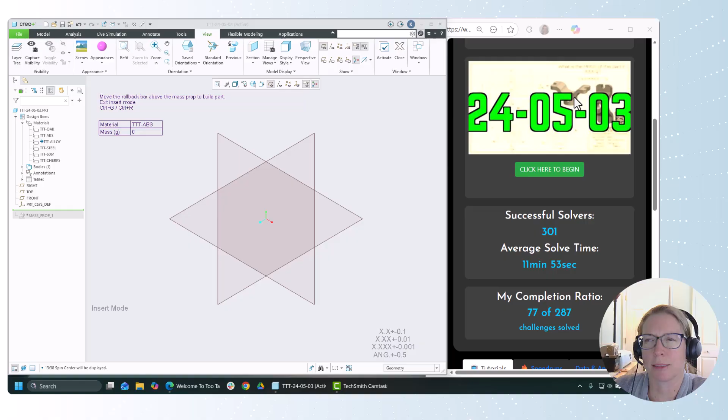Jumping back into Too Tall Toby, 240503, and we've got some symmetry and a tapered hole on this one. So let's jump in. All right, so we are in grams. This one is gonna be alloy. Let's see here. There we go. And let's go.

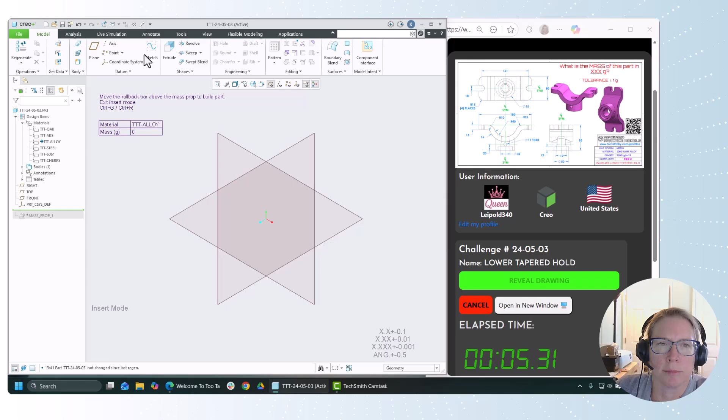All right, so I'm gonna start my sketch on the front view, and I'm gonna make this as a thicken sketch. I'm gonna do that, and then a center point arc. And let's get that dimension of 40. So that's kind of one of our main geometries. So what I'm doing here is I'm sketching for half of this, the inside, and then I'm gonna thicken, do some of the stuff on the end, and then mirror it.

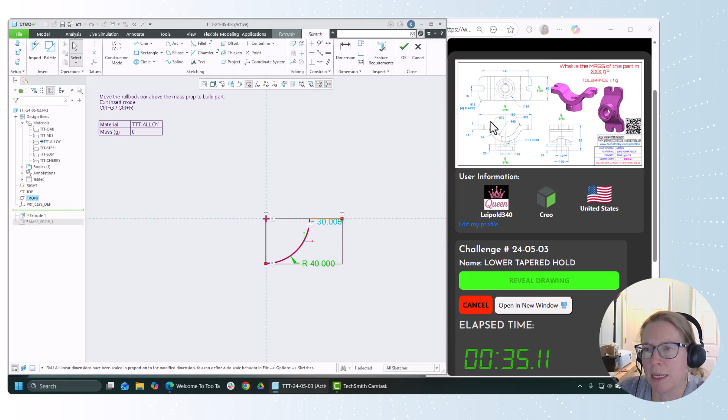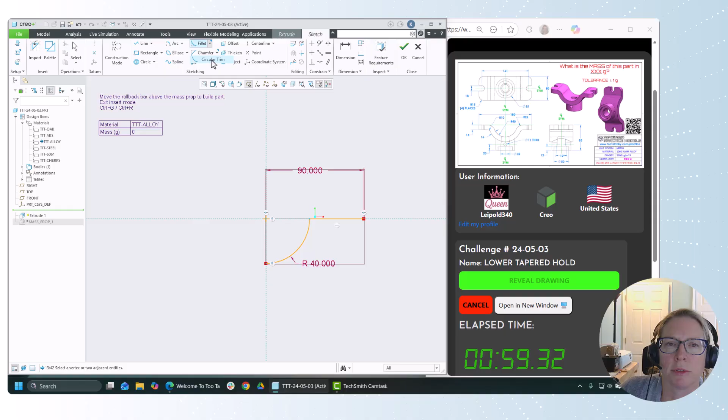All right, so grab this point and this line. Try that again. End point, line, and this is going to be 180 divided by 2. And we'll grab a fillet corner. Actually, we'll do a circular trim right there. Okay. And change this dimension to be that 26. Okay. So it's going to say it'll be switched to a surface.

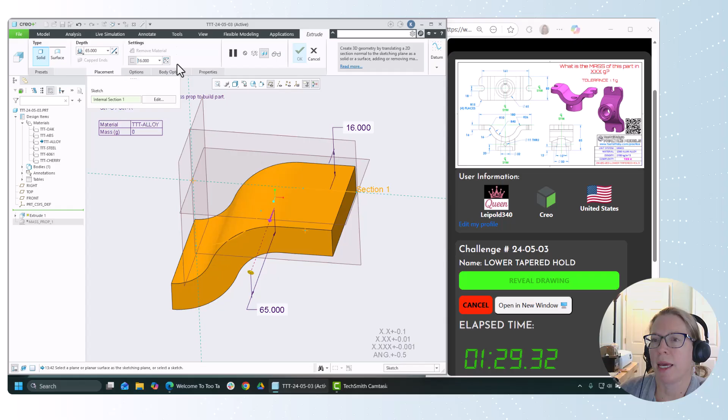Honestly, Creo, if you want suggestions, I would stop doing that. The thicken sketch is a great option. Maybe I would say you're going to turn it into a thicken. Anyway, we'll add a wall thickness of 16. We want to make sure that this is going away from the top plane. I do want it to be symmetric with a depth of 65. Okay.

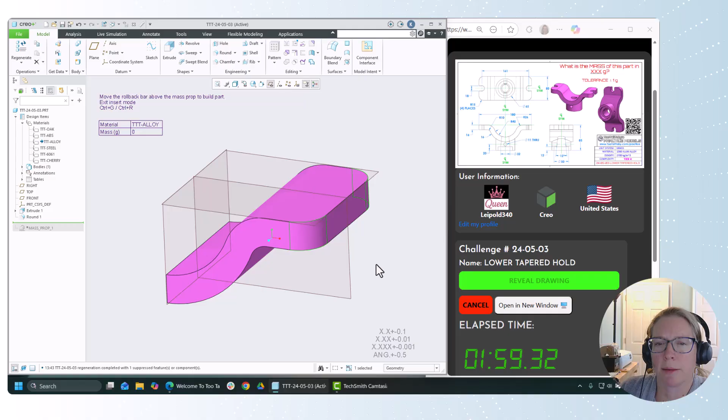All right, let's get this geometry on before we mirror that. So we'll grab some edges. And those do have a round of 15. So I held down Control to get them both in one set. And then we'll extrude the notch.

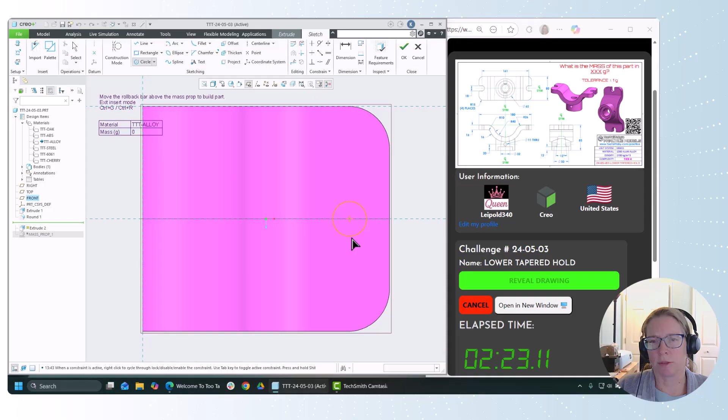So I'm going to drop a circle on this reference. Now, for some reason, it's not picking up this reference. And there's a bunch of ways to go about this. But one of them is to hold down the Alt key and then click on a reference or on anything, and it'll become a reference. So even though it wasn't picking it up as a reference, I can still add that as a reference if that's what I need.

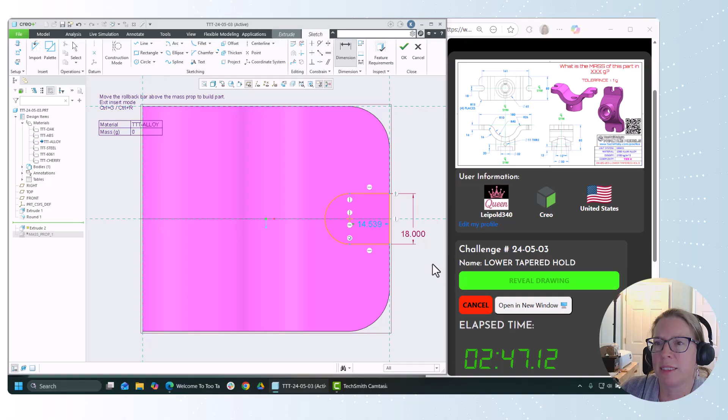All right, we're going to trim some of this out. The overall height of that notch is 18. And the depth is shown here as the 161. So we're going to dimension from the center point to the vertical reference, and that's going to be 161 divided by 2. All right, so we'll flip that, make sure we're removing material to next. And that is the geometry we need for that kind of shape.

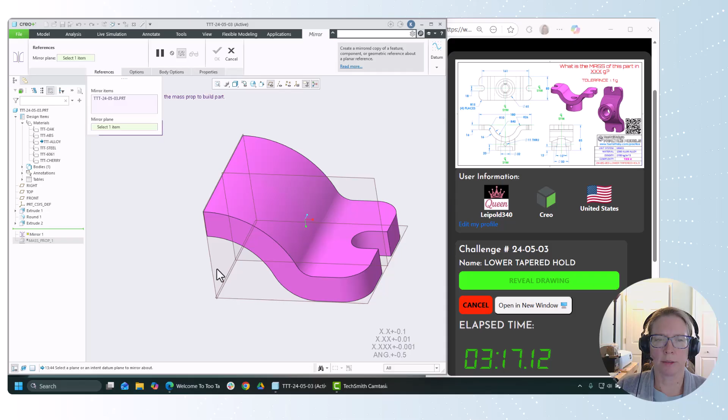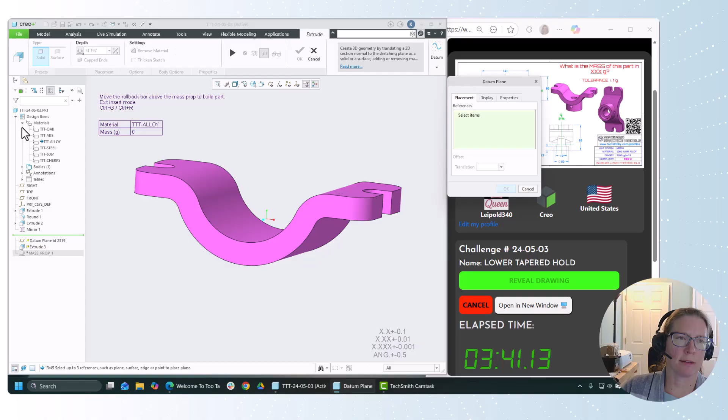So we're going to take the entire part and mirror the entire part over the right plane. All right, if I hit Control D, you can see that it is going in the right orientation. So we need to make the circle on the bottom. I'm going to extrude, but the plane I'm going to extrude from doesn't exist yet. I'm going to make the plane start at the bottom here. So add a new plane that will offset from the top reference. We'll flip it the other way. So it's going to be 85 below the top plane.

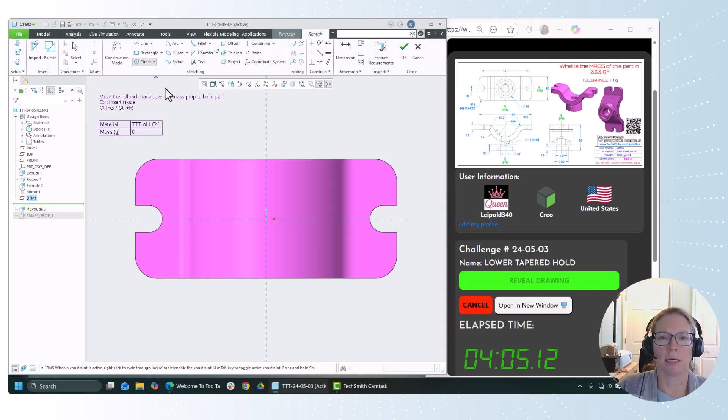Go resume that extrude, and it brings me up on the proper side. And I can just start with the overall diameter, which is shown here as 65.

Okay. I gotta think this is one of my first times working with this color. I'm not sure how I feel about this color as I'm modeling, but anyway,

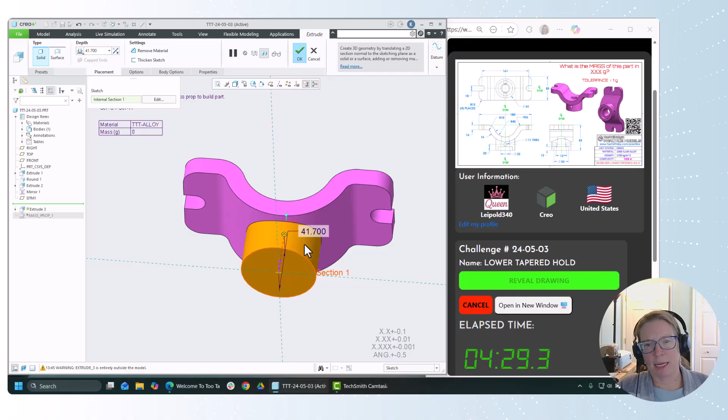We're gonna drag it down, and I want that depth to be to next. So I want it to stop when it hits the pink part. Okay. And then this hole that goes through here, we've got kind of a counterbore shape and then this tapered hole. I'm going to do that as an extrude instead of a hole.

And just for fun, I'll switch to the concentric circle so that picks up the center. Concentric circle will keep making circles, so middle click to finish that, middle click to be able to modify my dimension. And this is diameter 50. Okay. We're going to flip it the other direction. We do want to remove material, but only for a depth of 12.

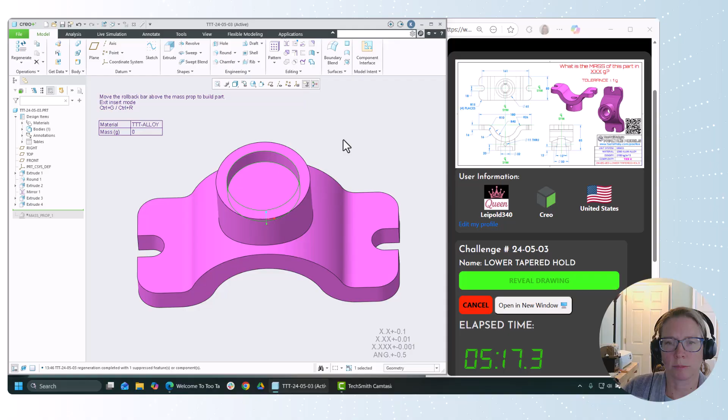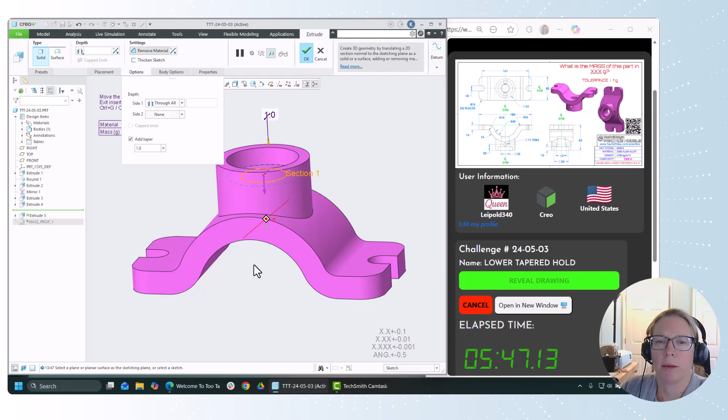And now we're going to extrude. We're going to do some very similar stuff. Another concentric circle, middle click to finish, middle click to modify the dimension. 32 is my diameter. All right, so this one, I'm going to click and flip and all that fun stuff. We are removing material. I want this one to go all the way through, but under options, I want to add a taper. Okay, so the taper has this little dragger, and I do want to see which way the angle's going.

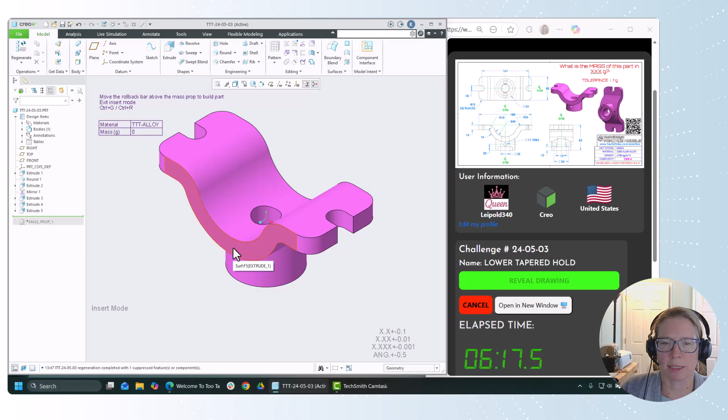So we want it to come in and have a smaller hole at the bottom. It gives me an angle of 12. If I were to make that 12, that would be too deep of an angle. To get the 12, we need 6 on each side. Okay. And you know what? Let's just double check that. It is an interesting shape. So let's look normal to that surface. And let's show wireframe. Okay. So that's looking pretty good. This is a good check, though, that I'm missing that circle, but that just confirms that angle's probably right.

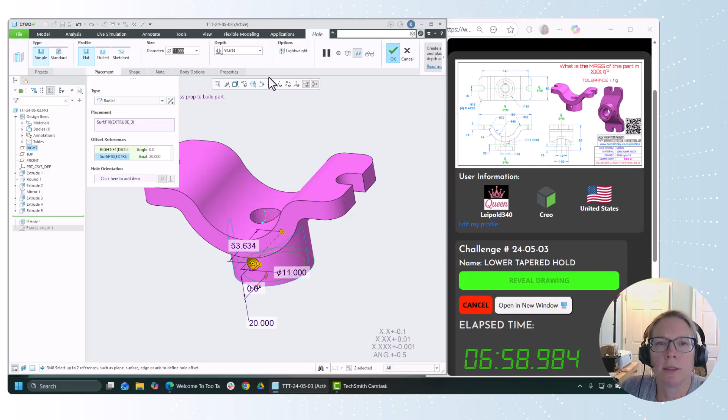Okay. We're going to add a hole onto that geometry. One of my offset references is going to be the right plane, and then the other one is the bottom of the part. We are angled off of the right plane with 0, and we are 20 up. Our diameter is 11, and the depth is all the way through. Okay. So that is looking pretty great. Let's see how we did.

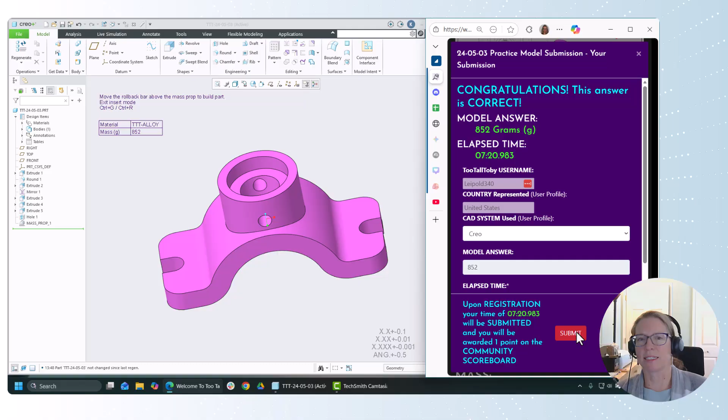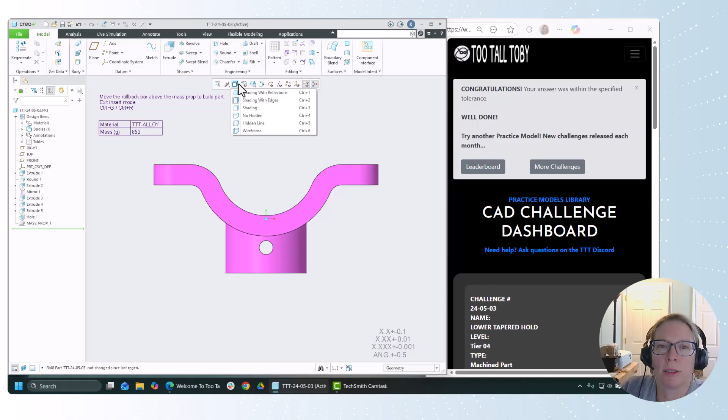We're going to try here, 852, and we got it. Fantastic. All right, so let's see what's new and exciting here. Thicken extrude. Holding down Alt to grab a reference on the fly. Using the View Normal To option to look at a side of a part, and then looking at some of these different options for our view styles. If you got really good at those, Control 6 is your, oh, that's not working while I have the camera up, but that's all right.

Oh, again, I have axes turned on for my rounds, so that's why I have more axes than most people.